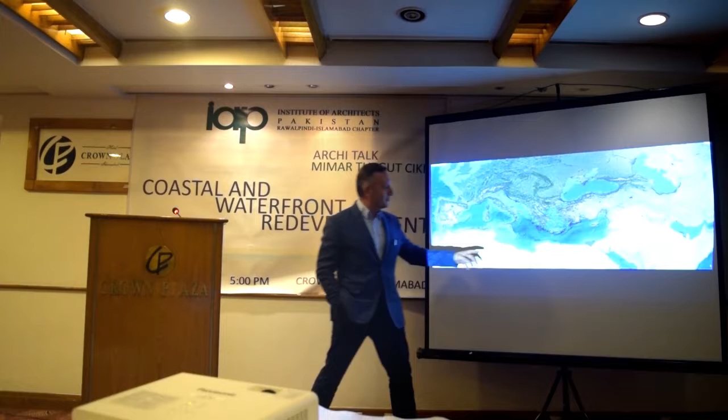You see the Mediterranean geography, and we are working in this area, in the western coast of Turkey. The second one, please. And the Aegean coast of Turkey, the western part of Turkey. This is Çeşme Peninsula, a small peninsula. It's very near to Izmir, which is the third city of Turkey.

As you know, our vacation understanding nowadays totally began a kind of coastal vacation related with the seashore. For this reason, all the coasts of Turkey, especially the western coasts, are under the pressure of this kind of second houses or summer houses especially. And Çeşme is also under these conditions now.

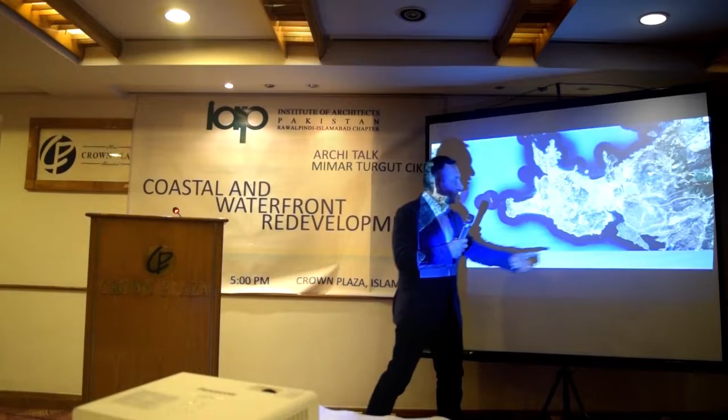Almost 16 years ago, we found a chance to build a different project in Çeşme. On this site, we have a project. Of course, we are not alone as a group — there is a group of architects, especially our advisors from France. It's a very experienced group.

We built together a part of this project. It's still going on — we are still working on the new phases. The name of the project is Port Alaçatı, which is the village of this town. But I must say that there was no port here, and this part was totally land.

But there is a small river here. We created a totally new channel by dredging and building some kind of new coast. With the buildings, we built at the same time the coast of this settlement.

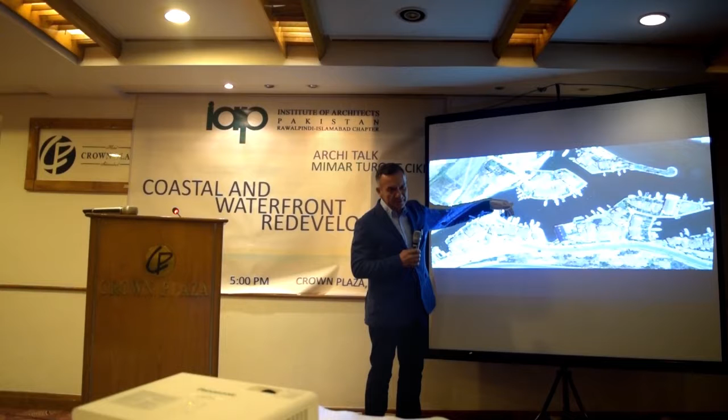This is a part of this settlement. Of course, these are the channels, new channels, and you can use boats here for mooring at the same time. The main idea is you can reach the houses by car from this side, and reach them by boat on the sea side. No problem.

These are from preliminary drawings. Of course, when we build this kind of settlement, we try to establish — it's a mass housing project, but we try to establish a kind of traditional settlement or this kind of development.

We try to analyze the traditional settlements and these examples, and we try to produce this kind of typological houses. We use traditional architectural elements, some kind of openings, and the plan types.

But some of the elements, for example, this kind of special cornice, create different effects or attraction points. Okay, can we change? It's not so clear, but these are our facade drawings, and this is the built phase.

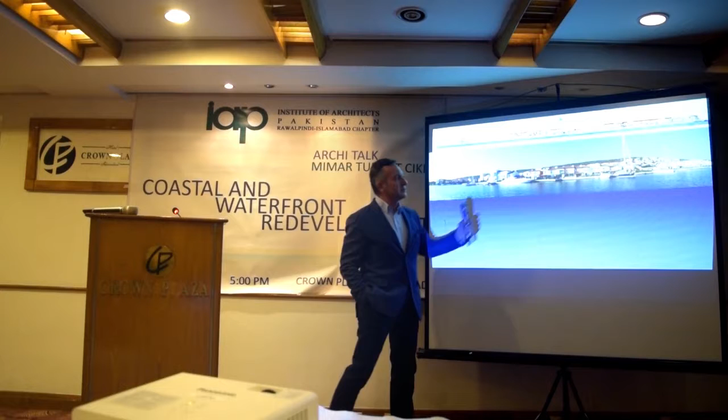You can see we have row houses here with different architectural elements, but for example, the plans are very similar among these houses, and there are some kind of special buildings — these are in fact the apartment flats.

Can we change? This is the aerial view of a part of the settlement. And these are the different types of houses.

For example, we sometimes have large maisons — a very big one with small boatyards. But the typical one, you can see this one: a unit with two-story houses, and we have a front garden on the seaside, and a small garden again in the backyard.

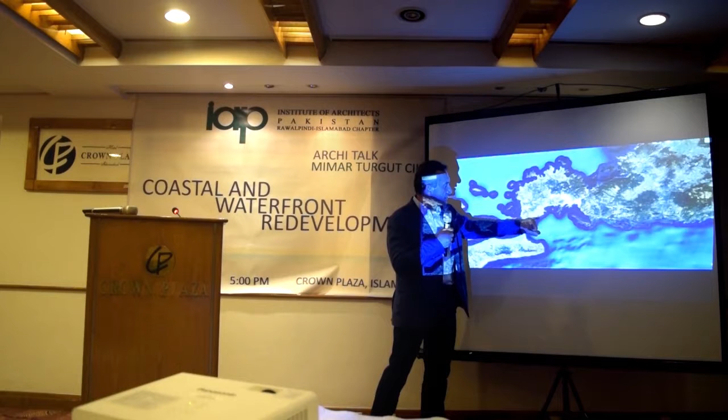Please, again the same map. İzmir is somewhere here, Çeşme Peninsula is here, Bodrum is here also. This is the Bodrum Peninsula, this is the Kos island belonging to Greece, and this is the Aegean Sea. You can see this point.

There is a volcanic hill here, and this part of the land is an archaeological area. There were some ruins here from maybe prehistoric times to the early Byzantine period. You can see some kind of ruins or elements in these parts here.

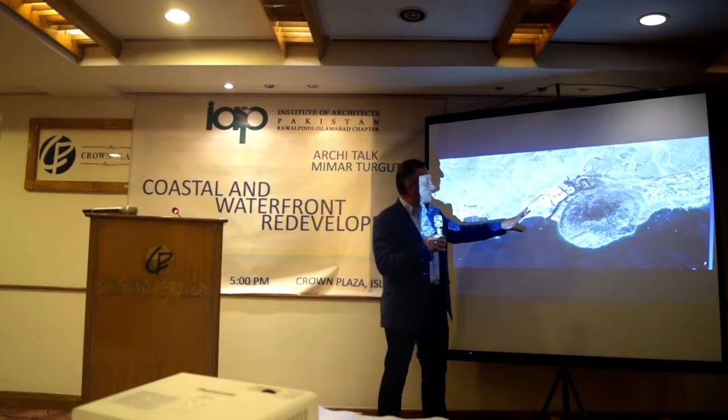And of course, in the old times, these parts were a kind of port of this settlement, and this small river brings the soil, and it becomes land again.

And these are the preliminary drawings. In fact, this is an empty land, and we try to create a kind of town center here, not only standard coastal second houses or summer house development or mass housing. We try to create a kind of town center with shopping and other activities, and of course we have a settlement, or housing sector, also.

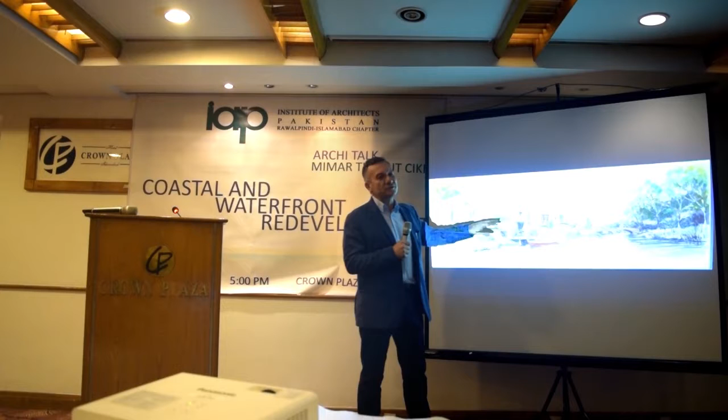Yes, these are also preliminary drawings, for the houses. We have different types of houses, for example row houses and apartment flats. Yes, this is the master plan.

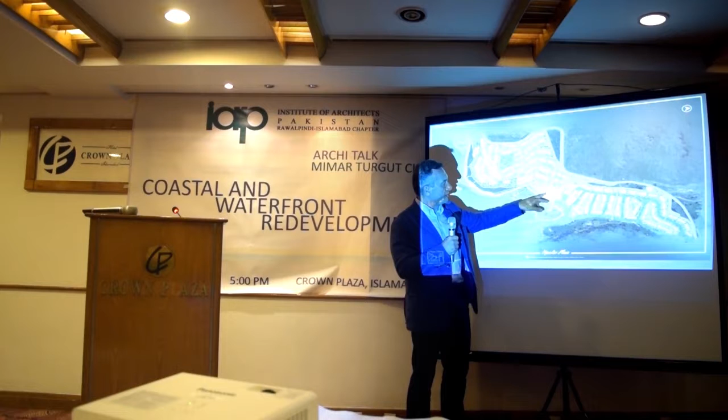Now, this part of the project is under construction, and this is the second part, the hillside houses, and the third part is the rear sector. Also in the project is the center. We have a square here, and shopping, small shops here, and we have hotels and other kinds of social activities, and we have a large beach area here, and this is the housing part.

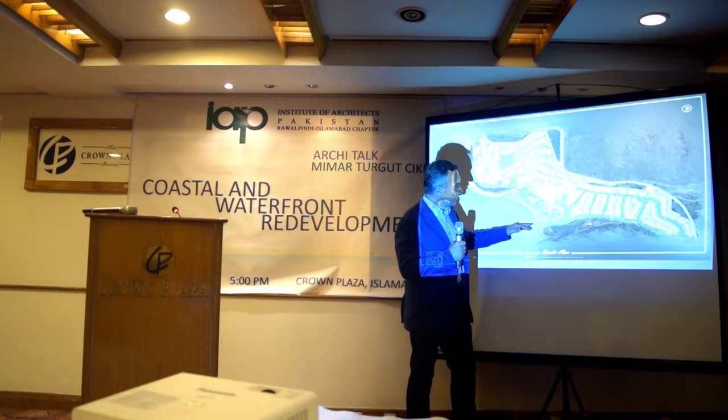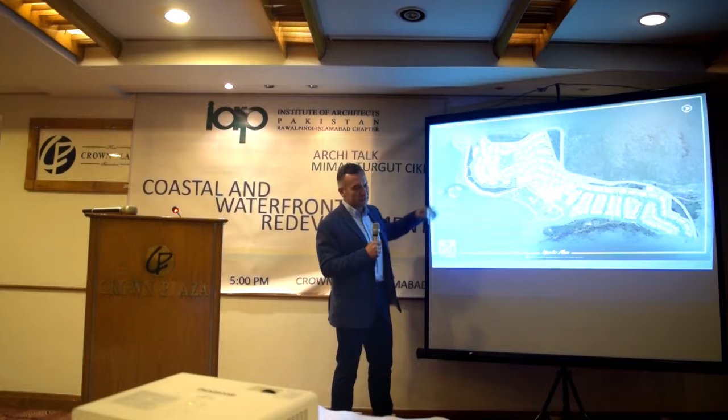Of course, we try to create a small port here. Again, we will dig this part, and a small basin here for the sailors also. And we try to organize a kind of boat mooring area on this part also, but these are the floating type of mooring elements.

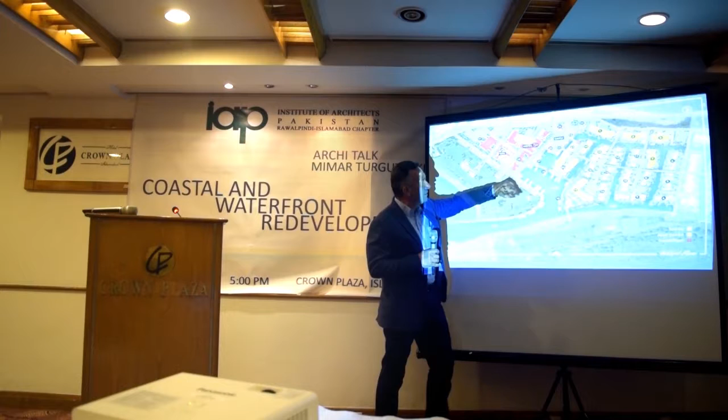Yes, and this is the first part. As I said, we have a hotel building and spa and restaurants. And this is the center, and this is the shopping area. And these are the three-story apartment buildings, and these are the row houses.

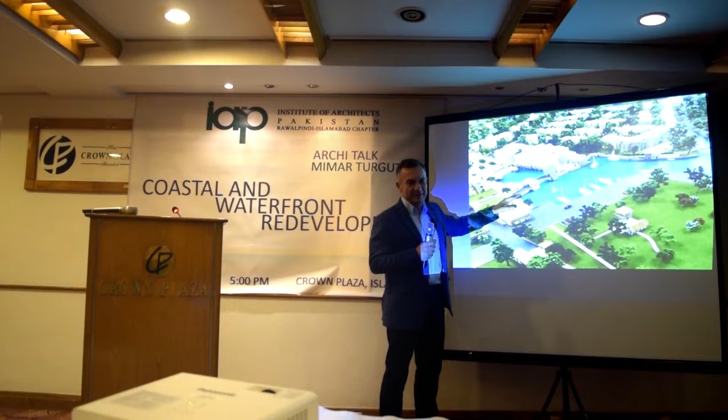These are from the model, and we try to create a kind of special building or special experience for this area. We put a large bridge on the center of the project, and we have also a tower with a bridge, and also we use these elements for the emblem of the project.

Yes, this is the house project. Of course, here also in this project, in Bodrum, and this area has a special kind of architecture for Turkey also: flat roofs, whitewashed buildings, stone walls, and small openings. We try to create this effect, the traditional architectural elements, and use them wider in the project also.

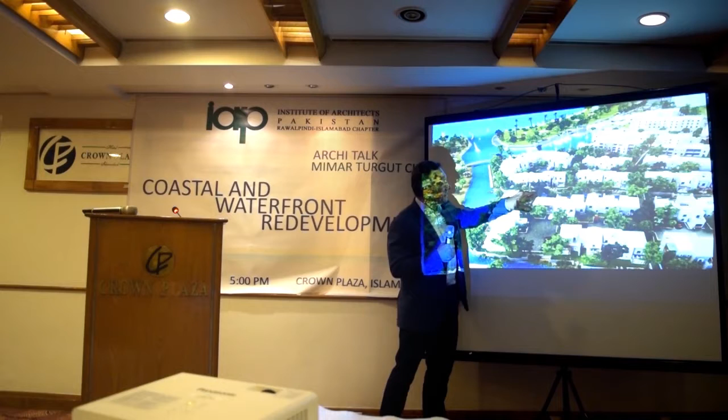And you can see the small river here, and we put some kind of branches, small creeks here, and our houses are around these small branches. In fact, we try to combine the land and water, and establish a different kind of settlement on the waterfront. Yes, like Venice - some kind of Venice.

Yes, you can see, of course these are again the facade drawings. This is the hotel building, and this is the bridge and tower, and these are the housing units. This is from the center square of the settlement. These are the apartment buildings. Again, the tower here and the bridge.

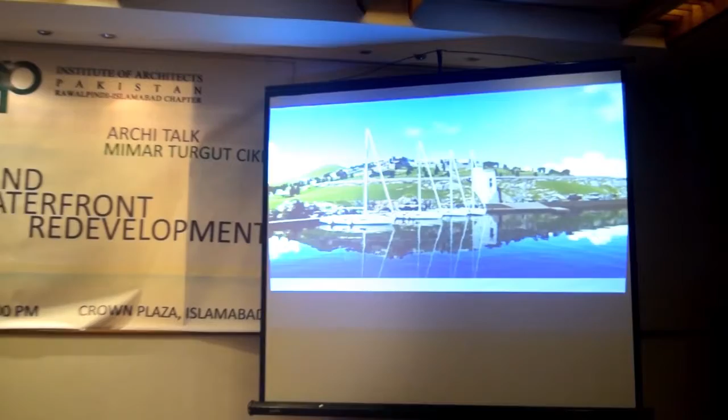We have a short movie, maybe we can show it. You can see the emblem of the settlement. This is the boat mooring area, and this is the hillside houses. This is the second part of the project, the hillside houses. There's the beach front of the settlement.

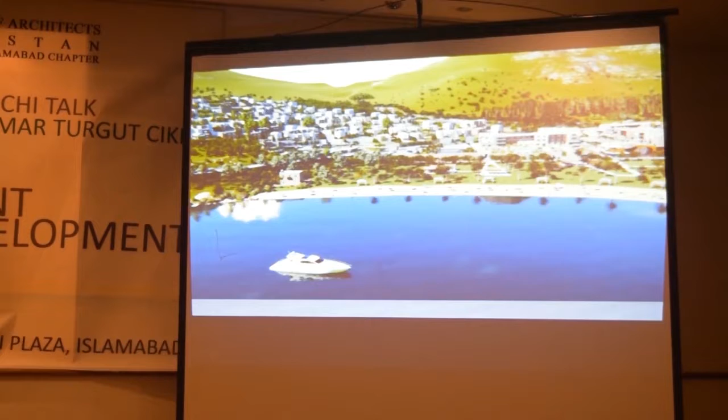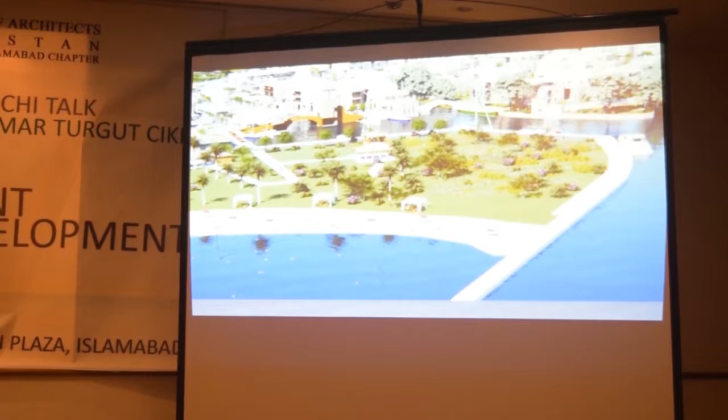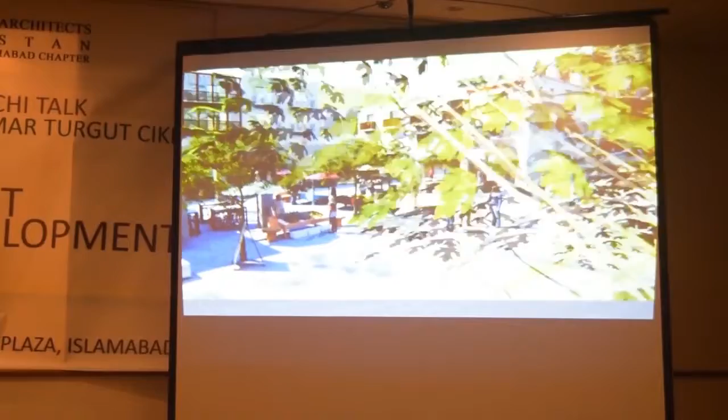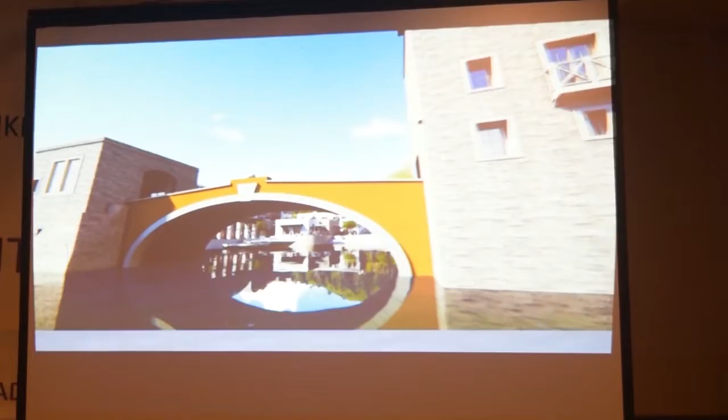This is the square of the town and the hotel building on the right side. We have one-story cafeterias and shops here. This is the fisherman's basin.

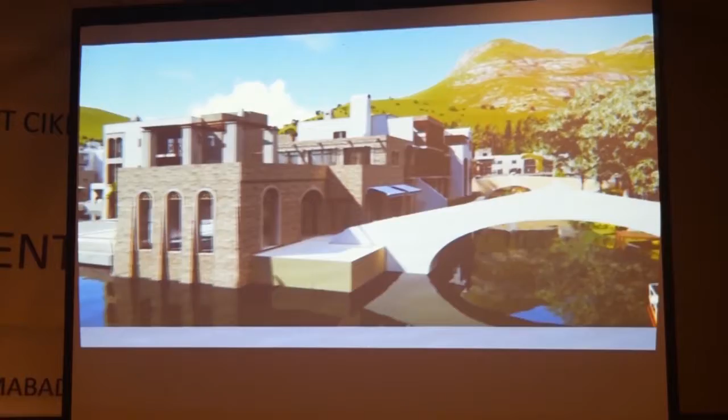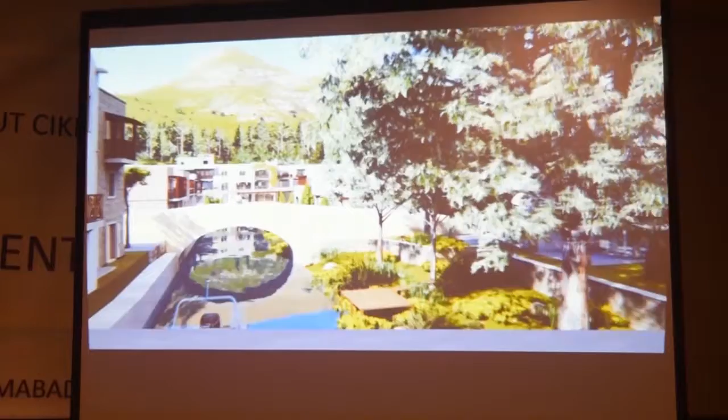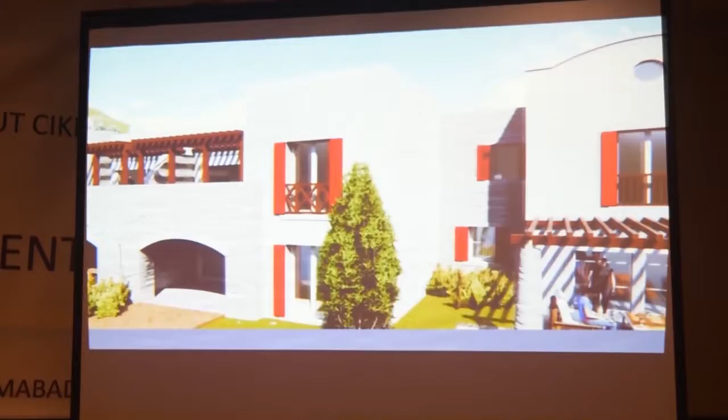And you will see on the other pictures there are many big trees on the land. We try to protect all the big trees especially, and the flora of the natural land. And of course we try to create again the small riverside shores.

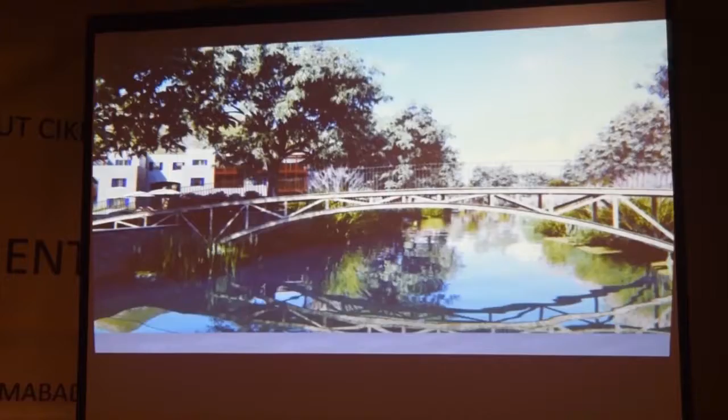The apartment flats, you can see different flats, but we tried to establish not one large huge block, but to divide the blocks.

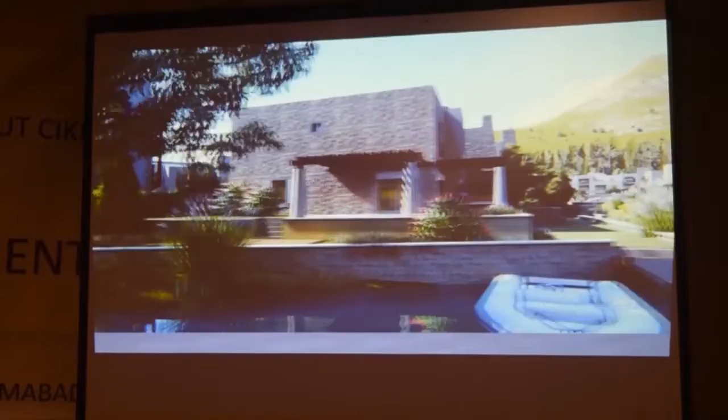This is the new site after the construction, and small branches along the houses.

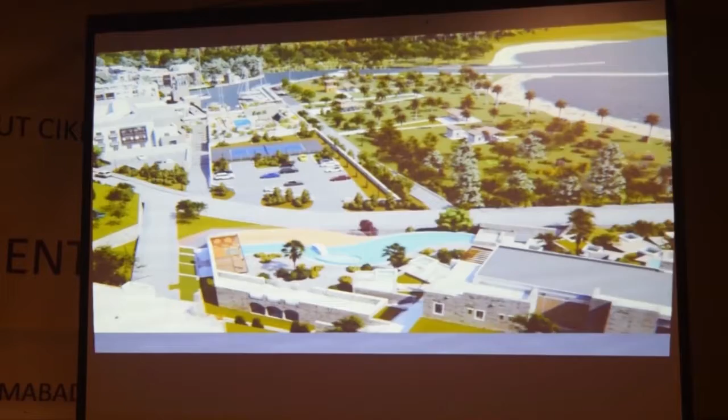Inside each area, a port, small port, and hotel building.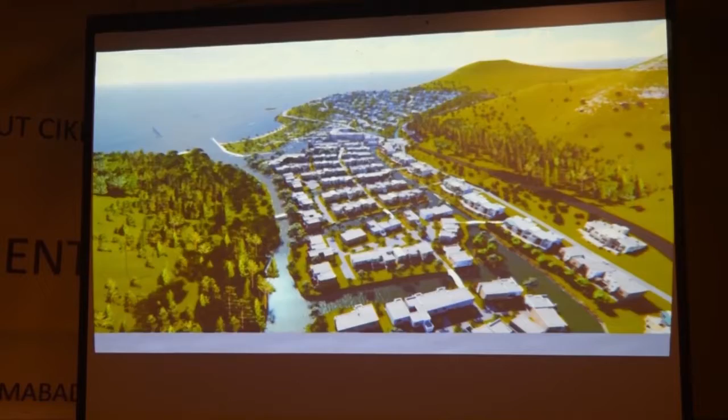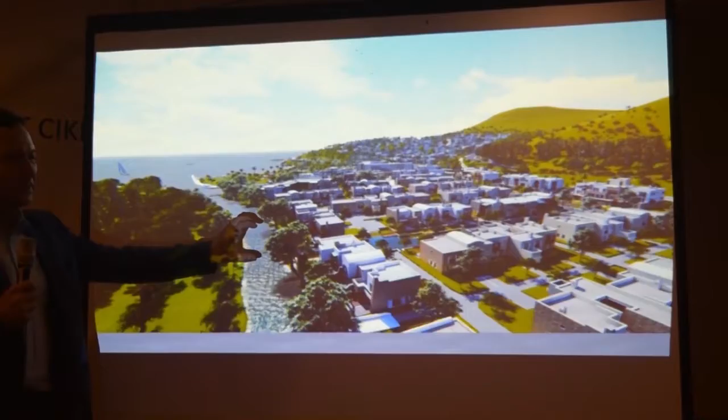In modeling we try to use small size trees here, but you will see the real trees are longer than this.

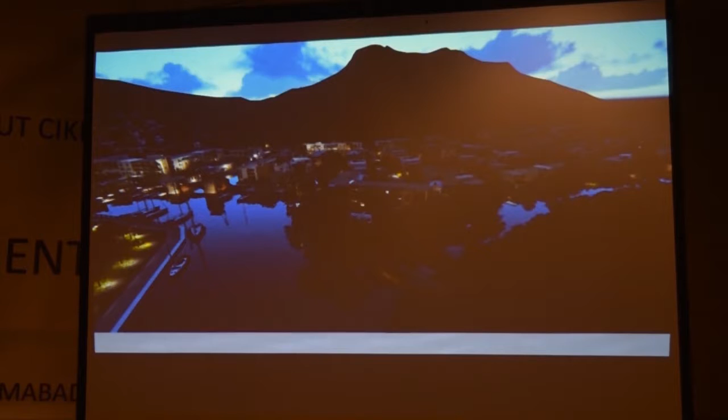We keep a connection to the archaeological area, and we will design an archaeological park also at this site.

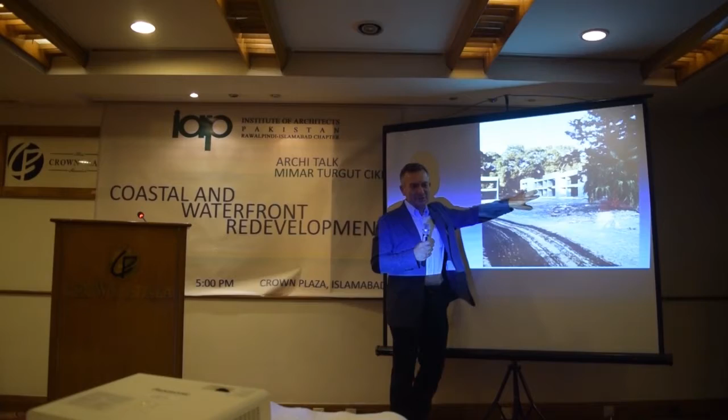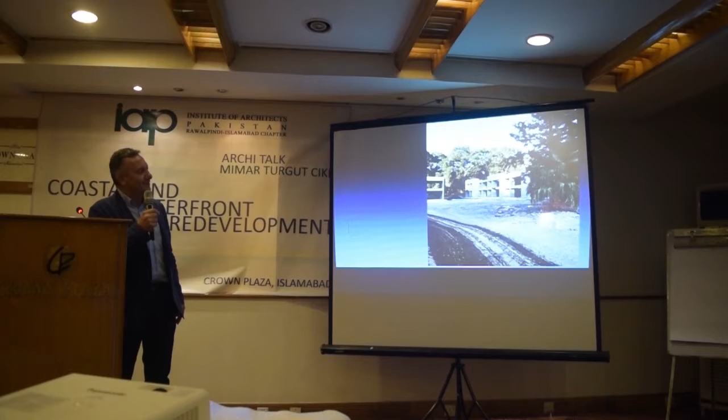At last, I put some construction photographs here. You see these are the row houses and these are the trees, and it's very hard to see the buildings among the trees. These are the last construction photographs.

Thank you very much.